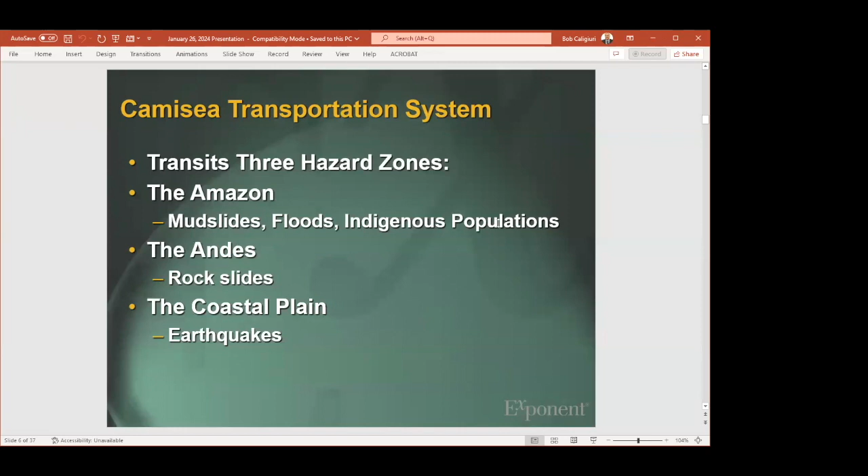And it has two 24-inch diameter pipelines, carbon steel pipelines. It was constructed and operated by a company called Transportadora de Gas del Perú, TGP, and went into operation in probably 2004. The interesting part here, and what's kept the Amazon oil and gas reserves from being developed, is that there are 3 hazard zones that this pipeline must traverse to get the stuff from the jungle to the coast.

So the Amazon hazards like mudslides, floods, and indigenous populations. Why would that be a problem? Because there are people in the Amazon, as you well know, who don't want to be bothered by the Western world. And so they had to be very careful to construct this pipeline system around those villages and areas of indigenous people. So it was a hazard in that sense.

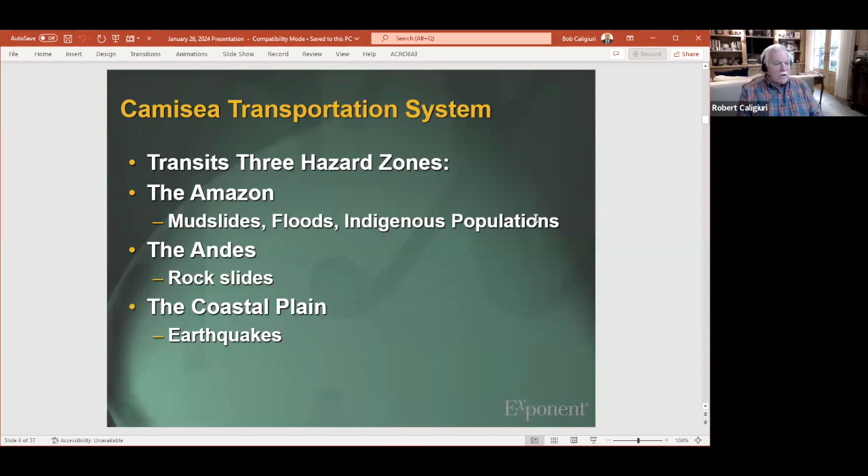Had to cross the 14,000-foot Andes, where you have rock slides and other issues, and then across the coastal plain to the coast. And as you know, it's a very high active earthquake zone. So it was very much of an engineering challenge to develop this system, which they did.

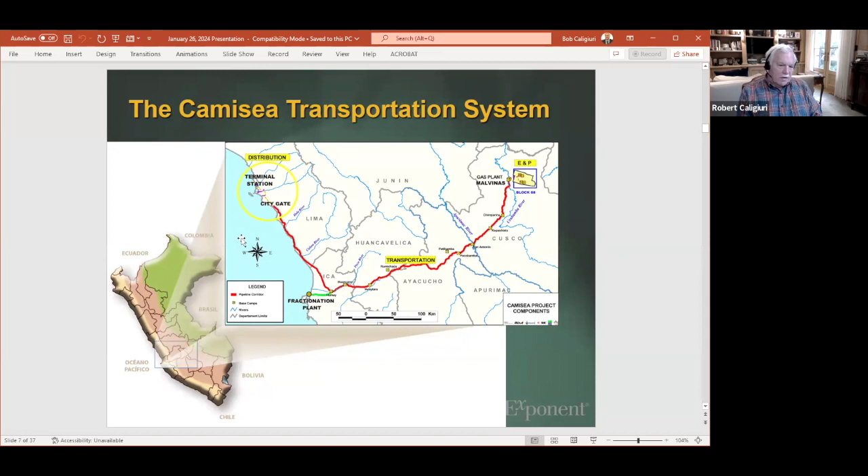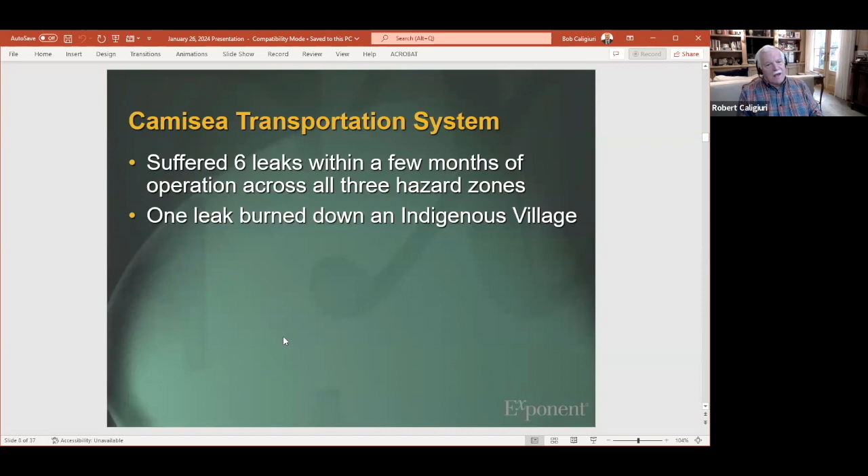What happened here? Well, not too long after they started this system up, these 2 pipelines, the one carrying the natural gas liquids suffered 6 leaks within a few months of operation across all 3 hazard zones. And one of the leaks burned down an indigenous village, which was not a good thing. People were pretty unhappy about that. So that was problematic. So what happened next?

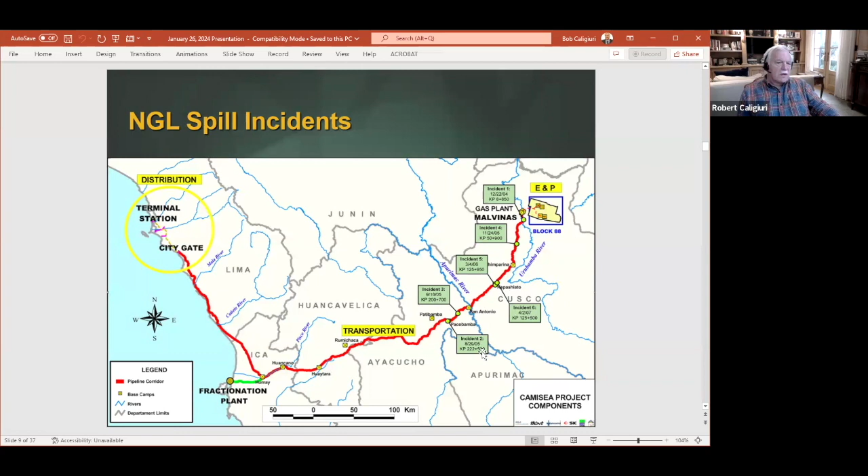Here's where the leaks were actually. There weren't any in the earthquake zone, but there were 4 in the jungle zone in the Amazon, and there were 2 as the pipeline system crossed the Andes. These are incidents 1 through 6. 1, 4, 5, and 6 were in the Amazon. 3 and 2 occurred as the pipelines were crossing over the Andes. And we'll talk a bit more about what these incidents were all about. That's the failure analysis part of the project.

We were contacted by the Inter-American Development Bank, who became very concerned about this investment that they made. And so they contacted us to investigate the causes of these leaks and, more importantly, to help TGP develop methodologies to mitigate the risk of future leaks. We actually worked directly with TGP and were paid by TGP, but with the direct support of the IADB behind us.

So what did we do? Well, first of all, why us? Because we were uniquely positioned to help here because of our multidisciplinary team of qualified specialists with lots of industry experience, professional engineering. We've got more than this, but applicable to this project were mechanical engineers, metallurgists like myself and Ron, geotechnical engineers, hydrologists, geologists. All of these disciplines were important in trying to resolve the causes of these leaks and help mitigate future leaks. So we were really uniquely positioned, and I would say we were probably the only company that could really do this on a consulting basis.

What did we do? Well, the first thing we did was to identify the factors for the first 6 spill incidents. What happened there? Then review potential systemic risk associated from design and construction. Are there risks associated with the entire pipeline related to its initial design or to its construction? Risks that would apply across all 3 of the hazard zones.

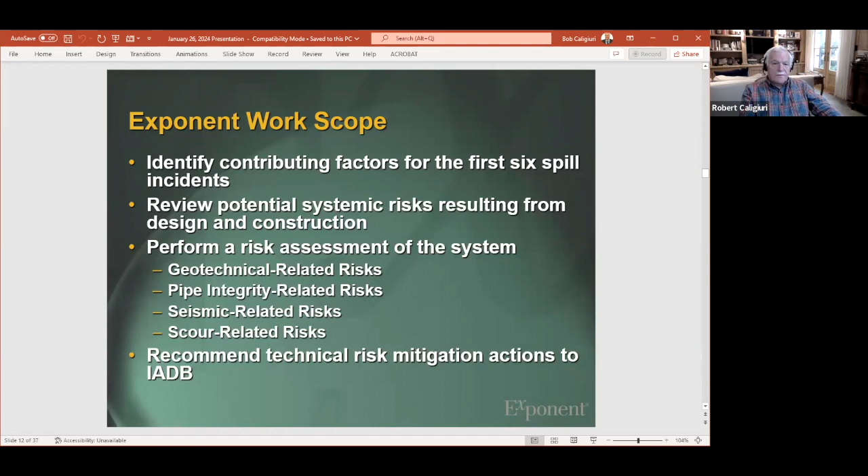What did we do? Field inspections of more than 50 sites along the right-of-way in June and September, like I said, a long time ago. That included out in the Amazon, which was quite an interesting experience, fighting off the bugs and the snakes. This is typical of us, 400 documents we reviewed. We did metallurgical work on the fractured pipes. We did an engineering analysis, and we did some risk assessment work as well. This work was done over a period of about 2 years.

Let's talk a little bit about what happened.

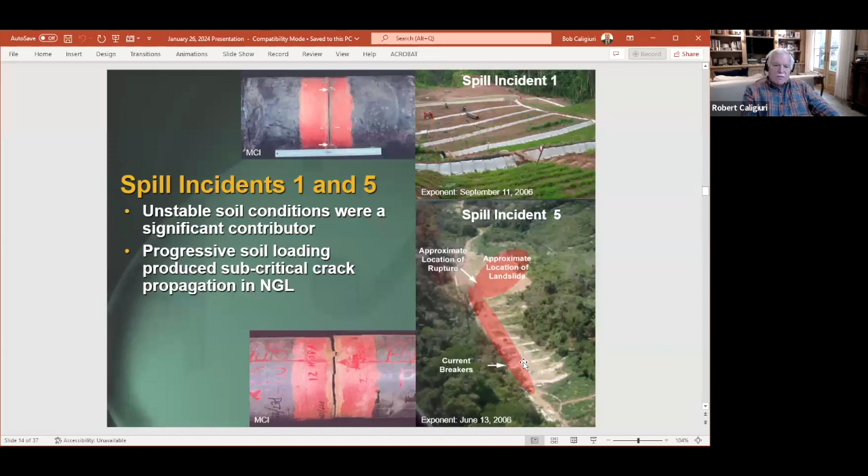Spill incidents 1 and 5, both of which occurred in the Amazon area, involved unstable soil conditions, mudslides, and moving soil as a significant contributor. As the soil moved, it put increased loading on the pipeline, producing subcritical crack propagation in the natural gas liquids pipeline, which ultimately led to the failure you see in the picture below. The pictures on the right show the soil.

Here's a closer look. You can see in June what it looked like, the soil that had moved, and then you can see where the rupture was. This moving soil is bad news on pipelines, and as you'll see, it's a theme amongst many of these failures. Afterwards, you can see the remediation work that was done, which should have been done in the first place to prevent the soil from moving. You can see the crack in the pipeline that resulted from being pushed by this massive amount of soil, which cracked the weld.

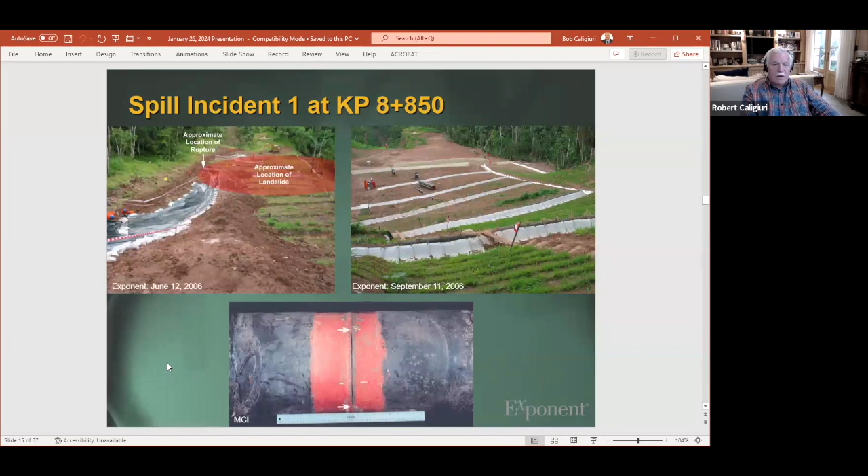This is incident 1, another similar incident. You can see another landslide slipping, and the soil moved, shown in the upper right picture. Again, another broken pipe right at a weld, due to overload failure from the soil moving on it.

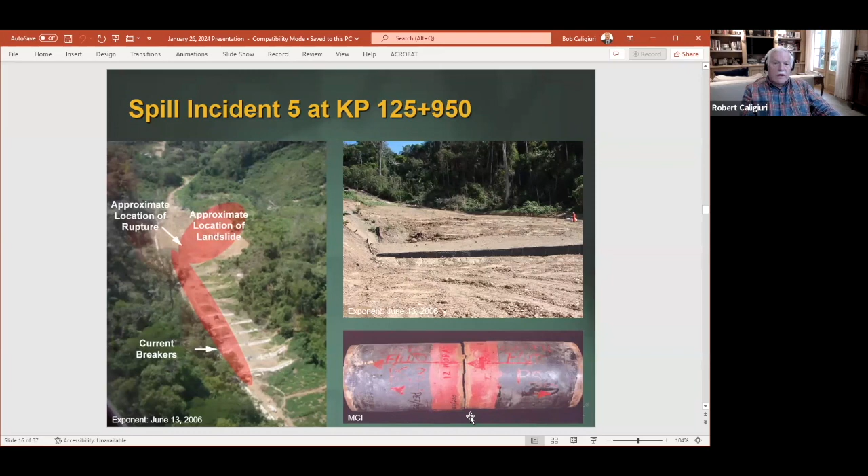Here's another one in the Amazon, again basically a soil movement issue. You can see in the lower right that this pipeline looks bent in the vertical direction, but it's really in the horizontal direction. The piece of pipe on the left-hand side got bent by the soil movement relative to the piece of pipe on the right, and it just cracked through and leaked.

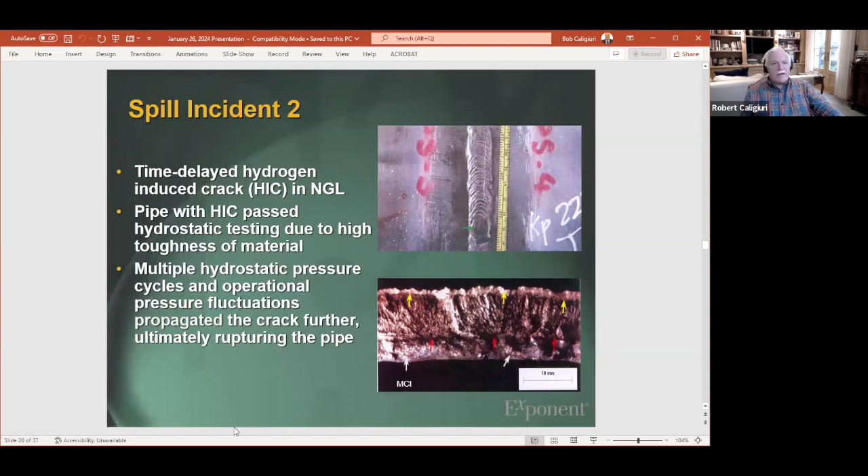It's interesting because people operating pipeline systems often think hydrostatic testing is the be-all, end-all to determine the integrity of a pipeline system. Well, it can help find things that are about to leak, but here's an example of where repeated hydrostatic pressure is not a good thing, because it basically drove a dormant defect in the pipe to go through wall and lead to a failure.

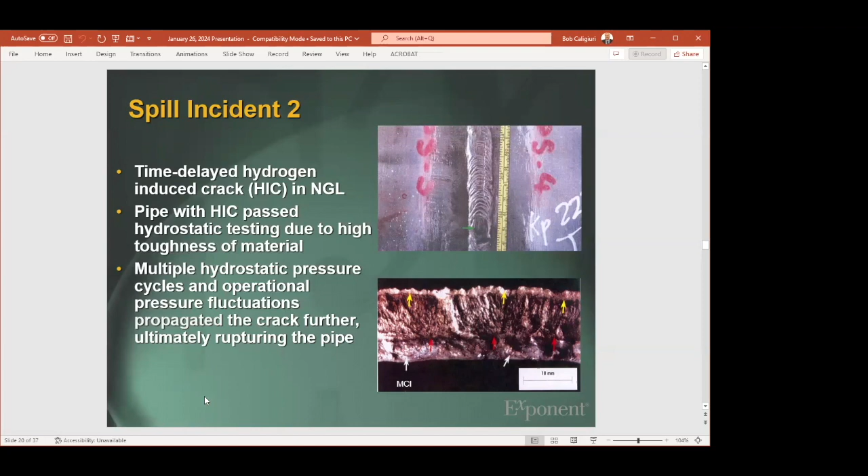Incident 3 is a different case again - another landslide movement. You can see the slope of the mountain here. This was a huge rock slide that came down on the pipeline. You can see the right of way there, and it just came down and nailed this pipeline and broke it, as shown in the bottom right picture - another overload failure. What they had to do was basically drill a tunnel through that mountain, through that ridge, to mitigate the risk of further rock slides.

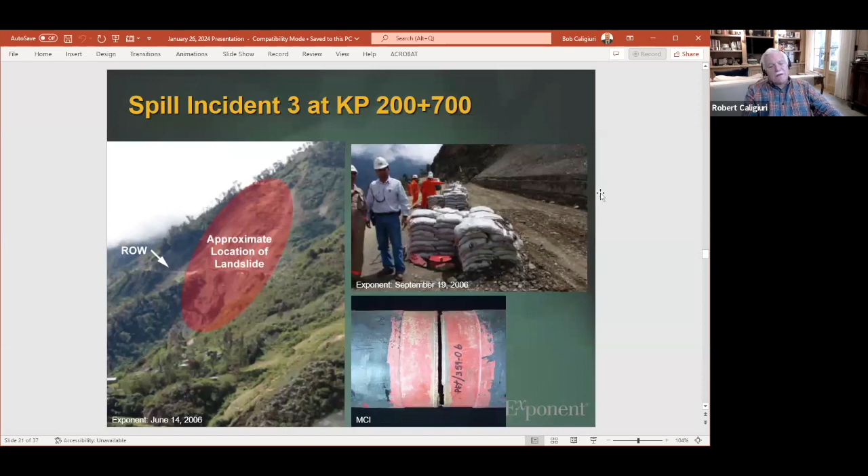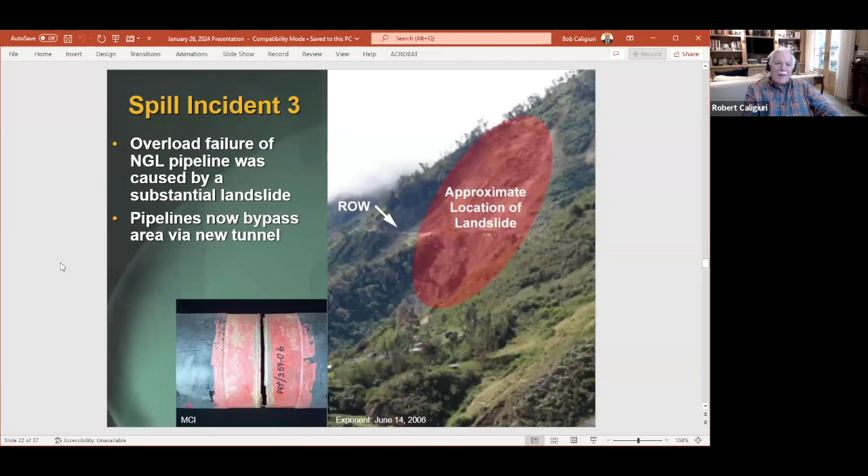And again, there you go, another picture of a broken pipe. You begin to get the picture here that there's a theme. The theme is that there were basically four kinds of risks looked at: design-related risk, construction-related risk, geotechnical-related risk, and scour-related risk. Geotechnical turned out to be one of the biggest risks related to this pipeline. As you saw, 4 of the 5 at least were related to earth movement in one form or another. So we recommended some risk mitigation methods for these risks and developed monitoring methods going forward for TGP.

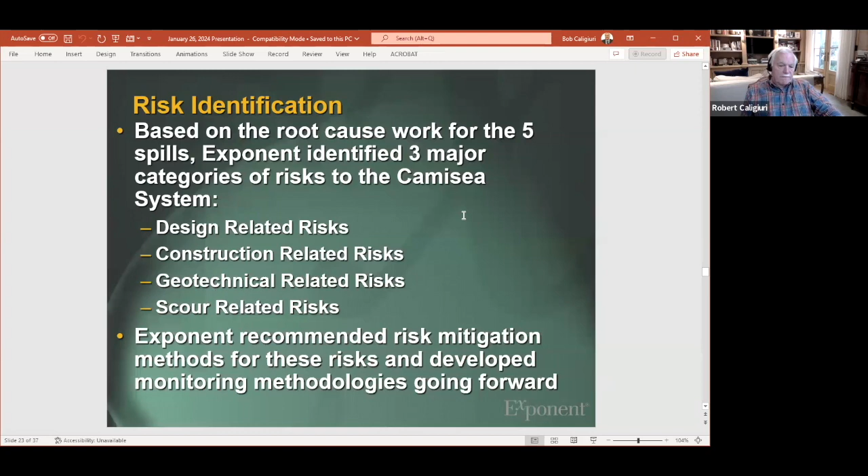The design-related risks, potential systemic design-related risks impacting future pipeline integrity, that's what we were looking at. Hydraulic risks, meaning risks from overpressurization of the pipe were minimal - in other words, the pipeline had been designed to carry the pressure they were seeing. In addition, there were designs to mitigate geotechnical measures, but some of them were not implemented correctly, and that's why we had some of the leaks. But the design was in compliance with API 5L and ASME codes. So the design of the pipeline system, the pipe metal, the welding processes generally were within code specifications.

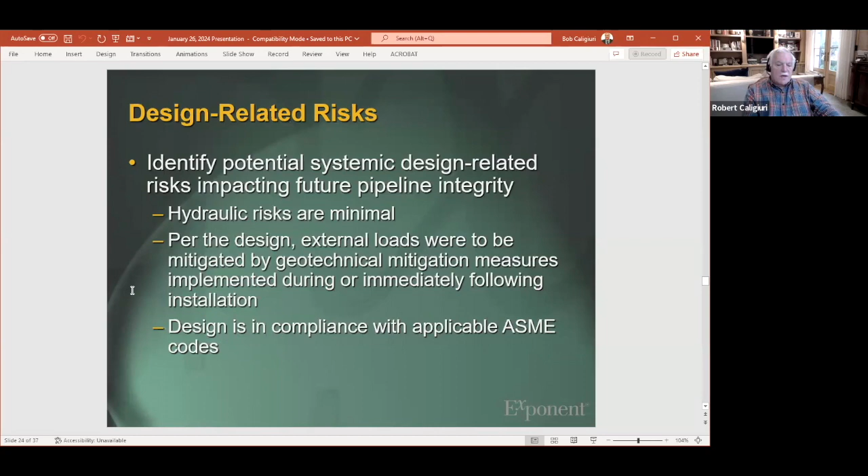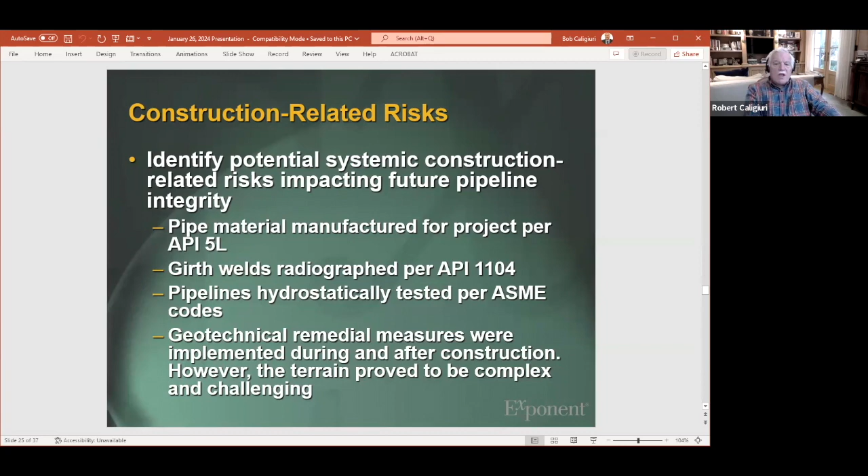Geotechnical remediation methods were implemented during and after construction. However, the terrain proved to be complex and challenging, and that's what the problem was with this pipeline system. It's primarily related to the difficulties of bringing it from the rainforest to the coast, and that caused the leaks. Those factors were not consistently thought of as this pipeline system was designed.

Risk to geotechnical conditions - like I said, this was just a nightmare of a construction project, trying to design a system and build it to traverse these 3 hazard zones and avoid the indigenous populations that were in there. It was quite a project. And they did think about the geotechnical risks, but they didn't quite implement them completely correctly.

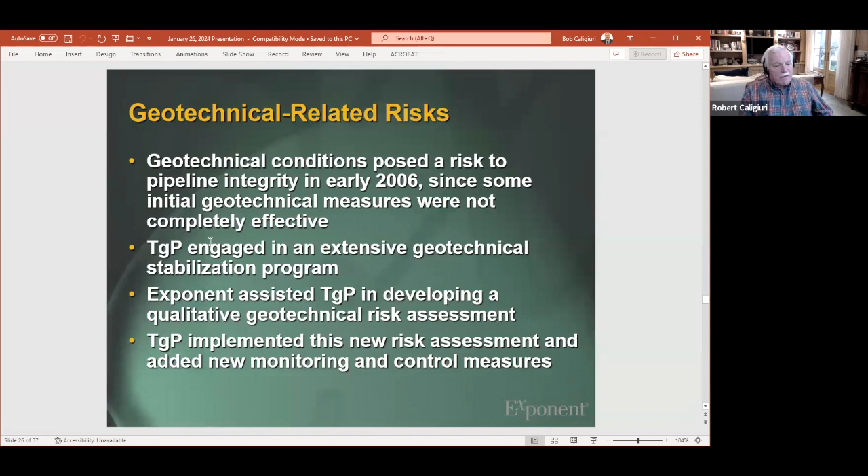As a result, based on our recommendations, the operating company engaged in an extensive geotechnical stabilization program. I'll show you some pictures of what they did. We did a qualitative geotechnical risk assessment, trying to identify the areas most at risk to this pipeline from a geotechnical perspective. They used this new risk assessment to add new monitoring and control measures - devices were inserted along the pipeline to look for potential earth movement, sensors were put along the right-of-way through the earthquake zone, and a number of control measures were implemented to try to keep this from happening again. So this is what a qualitative risk assessment looks like.

With that methodology and idea, that's what TgP did with our recommendations as they went along the entire right of way, trying to reduce the risk, primarily from a geotechnical perspective. So what did they do? They basically did weekly inspections of the pipeline at our suggestion - they walked the pipeline right-of-way looking for potential problems. Strain gauges were installed, piezometers were installed, slope inclinometers were installed, survey control, rainfall monitoring - all of these things they implemented now, trying to head off a potential landslide, rock slide, or mudslide, and if it looks like it's going to happen, come in and try to build the area up to strengthen it.

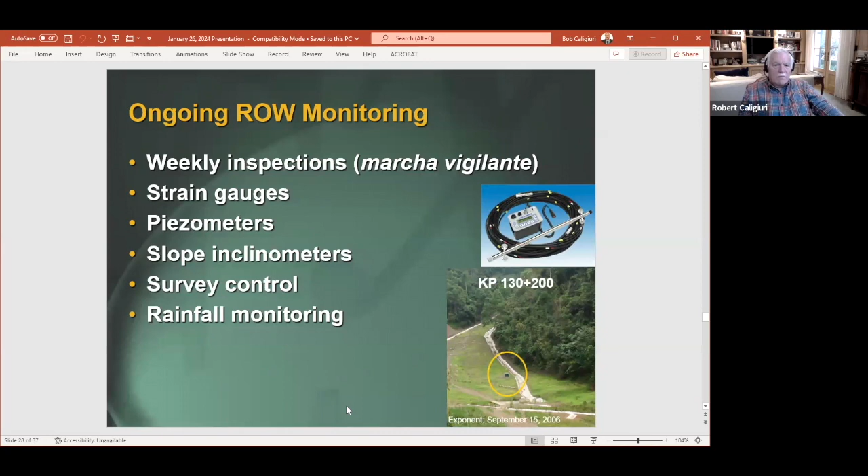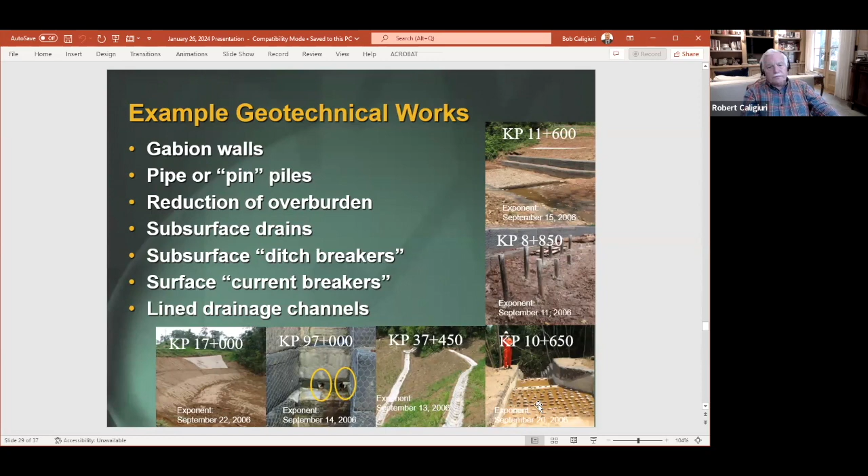Here's some more examples of the work done. You can see what it looked like in the upper left here, Exponent. We took a picture in September, and you can see the work that's been going on. Then this is the one in the lower right, which was particularly challenging as they tried to address it.

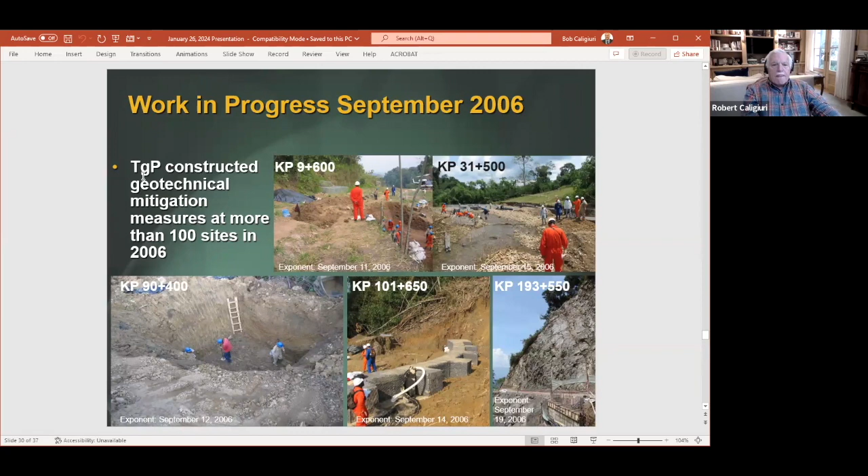You can see in the upper picture the big slope, and the pipeline was going up that slope. Then this is looking downslope, and you can see the work done to try to keep that mountain from sliding down onto the pipeline. On the right-hand side is another example, crossing over the Andes.

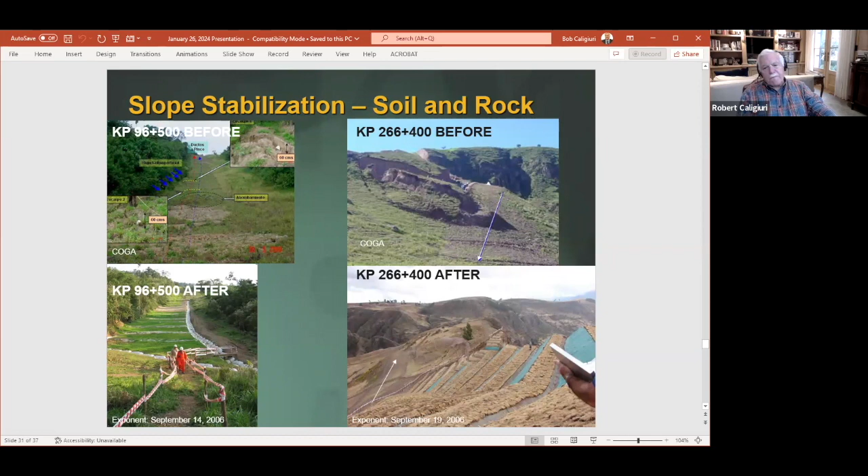That arrow is pointing to a problematic area in this whole mountainside. If you look in the lower right, you can see all of the work that was done to minimize the chances of rock slides as this pipeline goes through. The white arrow is showing where the pipeline is. Slope stabilization was done here.

Here's another example. I think I showed this before, but you can get an idea of the slope of this mountain, with the pipeline going up or down the slope, however you want to look at it. Then what they did in the lower left to minimize the movement of that hill.

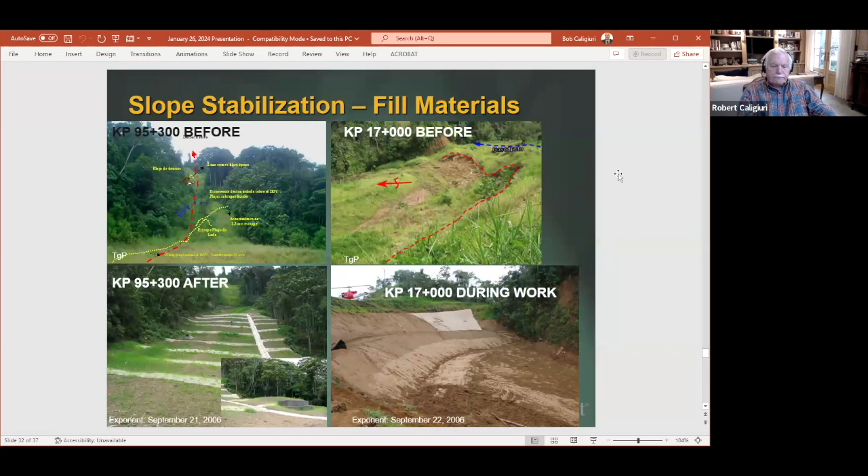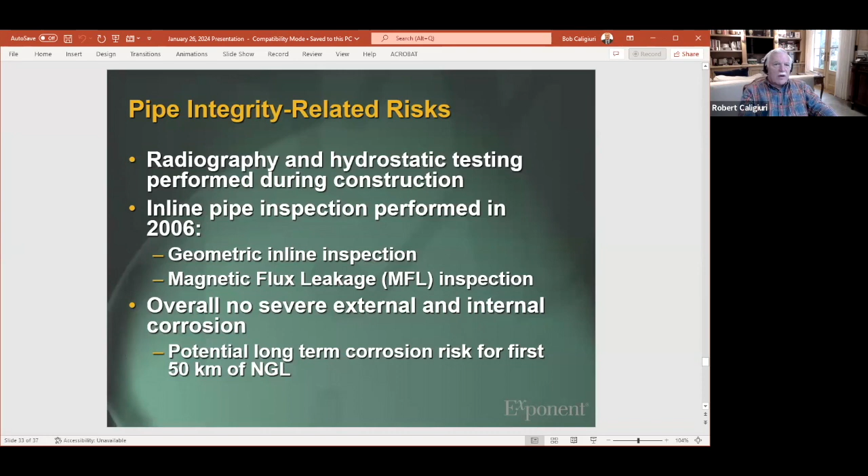So what are some of the other risks we looked at? We know that radiography and hydrostatic testing were performed during construction, and there was an inline inspection done using magnetic flux leakage. Basically at that time, there was really no evidence of any external or internal corrosion, so there really wasn't a long-term risk related to corrosion from a pipeline integrity perspective. We felt pretty good about the integrity and the ability of this pipeline to resist corrosion.

There were no failures of the pipeline due to earthquakes, but as we all know, that's a real serious risk, and the risks are due to uncertainties in the evaluation of permanent ground displacements. We recommended additional seismic studies, feeling the initial ones were insufficient to assess the potential effects of given earthquake magnitudes on soil movement. TGP actually went through and did that over a period of time, and so we believe now that the risks associated with earthquakes are minimized.

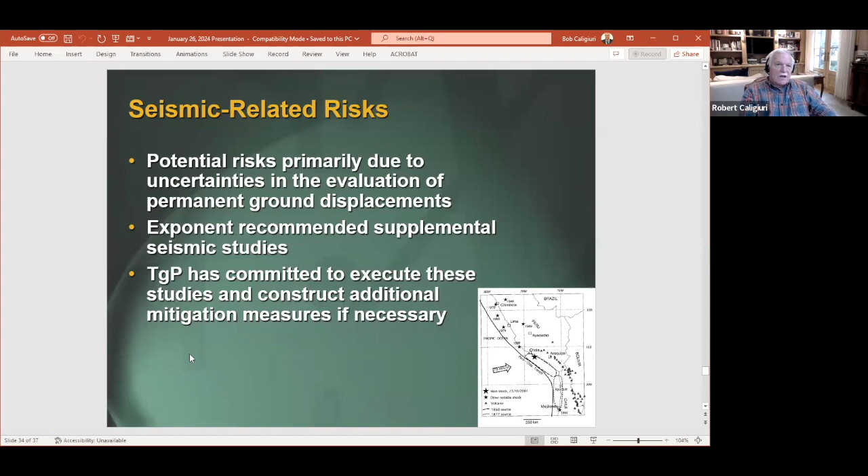You always have to remember that there's no such thing as zero risk. All you can do is work to mitigate the risk, whether it's a pipeline system or whatever it is. You work to mitigate and minimize it, but reducing it to zero is not engineering possible.

Scour-related risks, I showed you one of them. That's where that dent occurred in the pipeline, and the scour from moving water can carry a lot of stuff with it. And where that scour occurred that led to the failure, there were a lot of boulders coming down that water that impacted that pipe. And with the dent there, it couldn't take it, and it broke. So potential risk due to uncertainty of the scour hazard. That was really not thought of when they built this pipeline system.

And so we recommended some additional comprehensive scour studies, meaning there were many water crossings as this pipeline traversed from the sources of the natural gas, liquids, and gas through the Amazon. There were many water crossings, and we recommended that they consider what happens. Sure, when you build the pipe, the water is at a certain level, but you've got to anticipate what's going to happen during big rainstorms, and that's a big deal there in the Amazon.

And they hadn't really thought about that very much, so we recommended that they go through and consider for each of these stream crossings, waterway crossings, what happens if you get a really high flow of water through there? What can you do to prevent that from failing?

So what were the conclusions here? The pipe material selection, we felt, was not a problem, nor the construction of the actual pipeline itself, which is not always the case. But in this case, we felt that they had done a pretty good job, so it didn't really pose a risk. There was very little corrosion damage, and we've asked TGP to continue to investigate any potential risk arising out of these girth welds. We did see one girth weld failure due to hydrogen-induced cracking.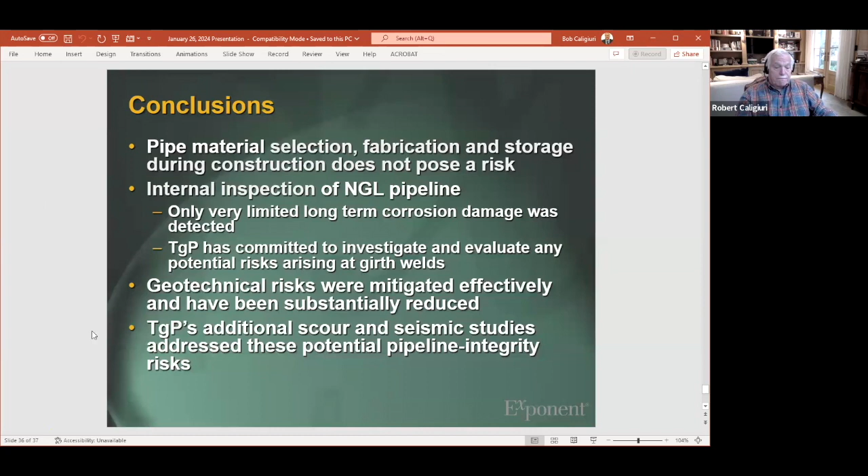Just a comment. You mentioned risk assessment many times during your presentation. You might be interested that one of our speakers earlier in this program was Ali Mosleh, who is now the director of the Garrick Center at UCLA. Garrick, of course, was the developer of quantitative risk assessment for nuclear applications. Yeah, we bought his company. Yes, that's exactly the point I was getting to. Oh, okay. There are two interesting offshoots of all of it.

First of all, John Garrick, as you point out, was the father of risk assessment. But secondly, I think now of Dan Metlay, who's one of our crew here today. Dan Metlay and I served when John Garrick was the chairman of the Nuclear Waste Technical Review Board. We were members of the board at that point. We served on the board and the staff, and John was a wonderful guy. He really was. And it was just an interesting experience. But my major point is that risk assessment is something we've heard from Ali about, and he's a very good spokesman. But let me ask a technical question here.

That pipeline looked like it must have been about 400 miles long, I think. It was just under 1,000 kilometers. Holy mackerel. And it is operating today? Yes. Now, I'm just curious, when it was designed, it sounded like they had a design that looked workable, but in some respect, I think you said it may not have been implemented fully.